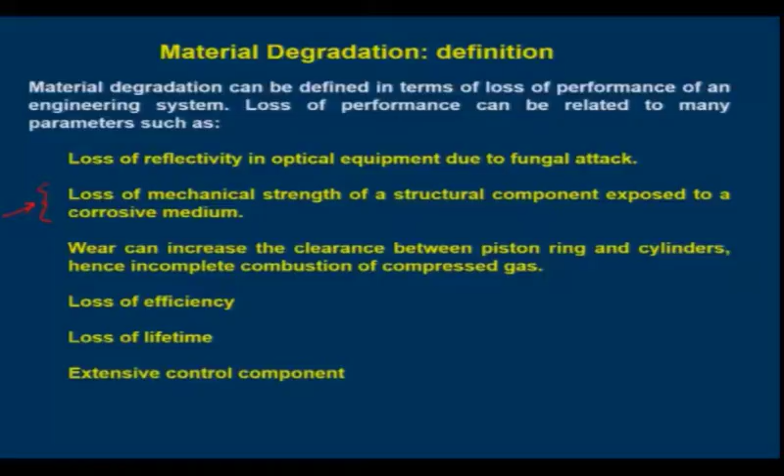Now, coming to the reasons or phenomena that can cause material degradation, there could be anything available in the environment, because every time we expose a material to the environment for our purpose, factors like heat, light, short wavelength electromagnetic radiation, radioactive emission, chemical and mechanical stress, and interactions with bacteria, fungi or other life forms. So all these factors will be reasons, in some way or other, for material degradation.

Hence, the classification of material degradation according to its basic cause is a first step in any plan to protect a specific material in a specific situation. That is what we have been talking about.

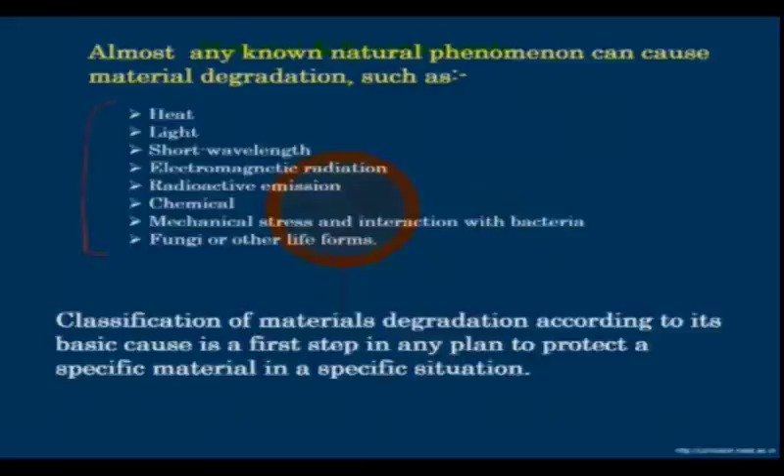Now, coming to materials and environments. Interestingly, if I look at materials, the first thing that comes to a material scientist's mind is basically the material tetrahedron. And in the material tetrahedron, if I draw it...

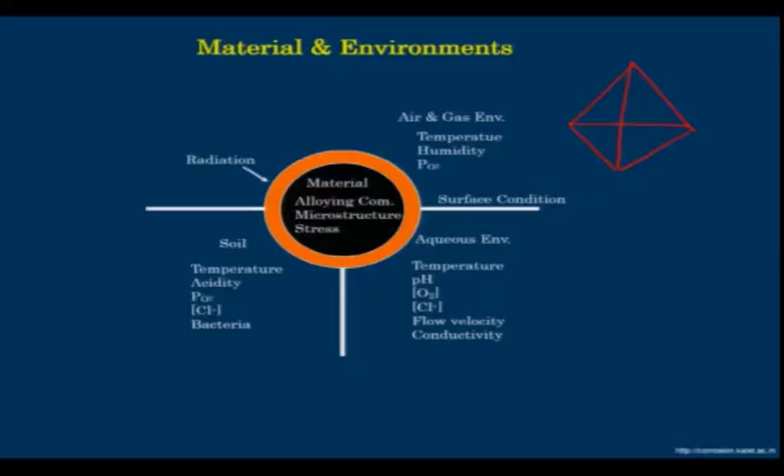This is the kind of material tetrahedron we see, where structure is one side, then processing, then performance, and then properties. Now, in the structure, we can also have one more criteria, which is called composition. For a particular composition, this structure, properties, performance, and processing are all interrelated.

So this is a classic material tetrahedron. Now, if I come to this particular picture, this material tetrahedron, we have made some material for performing some duties. For example, in some cases we need to hold a particular load, in some cases we need a kind of protection against corrosion.

Or we need to prepare material that can be protected, that can be resisted, all sorts of things. Now, if I consider materials, alloying compositions come under compositions, one particular field of the material tetrahedron; microstructure comes under structure again. Now, stress is basically a factor which can come under processing or performance.

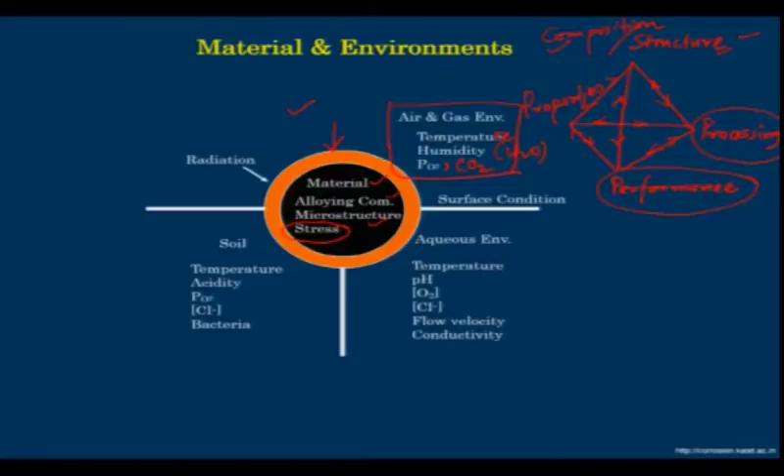Humidity, which is nothing but H2O content, PO2, oxygen concentration is there. Then there could be another factor, CO2, which is also available. Now these kinds of gases and environments, they many times have a negative effect on material performance, like atmospheric corrosion of iron objects.

Coming to surface condition, I will address that a little later. Now coming to aqueous environment - many times a material or structure is either in the soil, in water medium, or in chemicals, so that aqueous environment comes into play.

Whenever we come to aqueous environment, we have temperature, we have the H plus ion concentration or OH minus ion concentration, which is called pOH. So pH, pOH, dissolved oxygen content, chlorine ion - we gave an example of chlorine ion, but there could be other halides, for example fluoride. All sorts of halides are deadly towards the corrosion of metallic objects.

Now, flow velocity - this also comes in as a kind of corrosion aspect. You might have heard about cavitation. Cavitation is a serious kind of damage that happens due to a change in pressure during operation of impellers, pumps, and similar equipment. So flow velocity also plays a role.

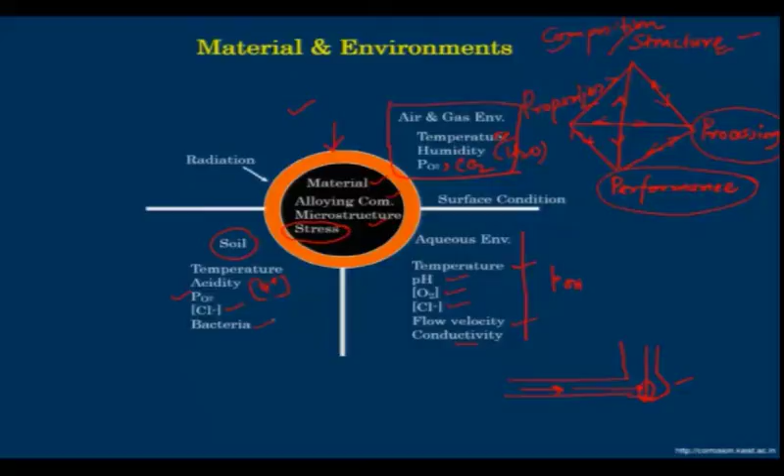So this is the surface condition - now coming to surface condition. Surface condition means whether something is exposed to the gaseous or air environment, or below that, within the soil, in water medium, or in other liquid chemicals. Now coming to radiation - this is also another factor which can lead to problems with materials.

So this is the relation between materials and environments, which is not a very friendly relationship. They are always trying to attack the materials.

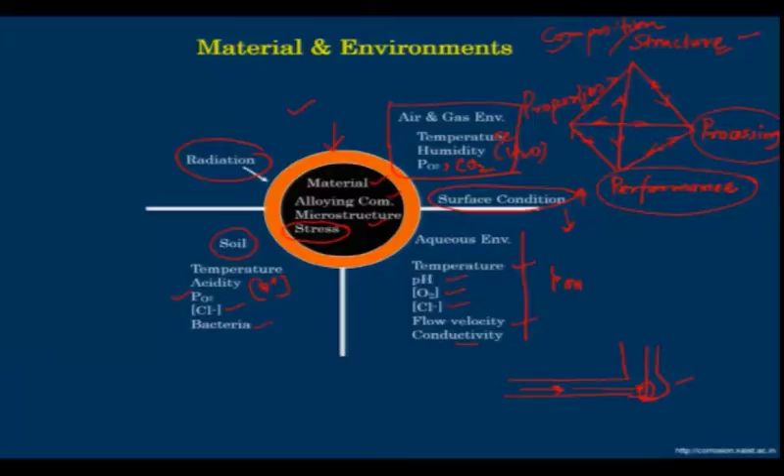Now coming to the corrosion part - let us forget about corrosion for the time being. Let us say, how do we get iron? Iron is first generally made in a blast furnace, and in the blast furnace, it is basically a reduction process, where we reduce iron ore in the form of FeO, Fe3O4, or Fe2O3. These three iron oxides are reduced by carbon, which is why iron always contains carbon.

If carbon presence is below 2% or 1.8%, we call it steel, and beyond 2% carbon by weight percent, it is called cast iron - this comes from the production route, which is the blast furnace. After reduction we send it to another plant called the steel making plant, where we do oxidation, because once we form iron from the blast furnace, it is generally called pig iron. That pig iron contains many impurities, which are removed by oxidation.

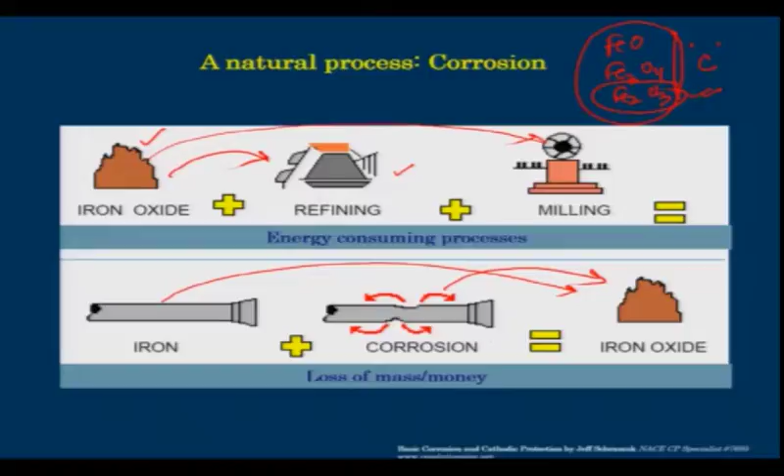Now coming to definition, there are two definitions. One is the practical definition: the tendency of a metal to revert to its native state, which relates to what we discussed earlier, where we are taking iron from iron oxide, and now we are reverting iron back to iron oxide. So the second process is a natural process, while the first process is energy consuming. This loss of material means there will be loss of mass and loss of money. So this is the practicality in it, the tendency of a metal to revert to its native state. Native state means iron oxide or iron ions, those are native states.

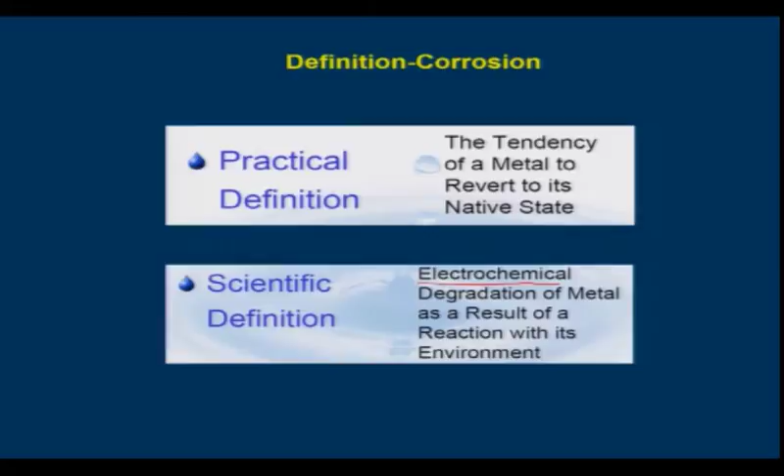Now the scientific definition: electrochemical degradation of metal as a result of reaction with its environment. Here interestingly we are using electrochemical, not chemical. Whenever we talk about corrosion, we must consider that the metal is reacting with its environment electrochemically. That means there is a formation of metal ions, so metal atoms go into ions. That is the scientific definition of corrosion.

Now coming to the definition of corrosion, continuing: the destructive attack on a metal by electrochemical reaction with its environment, as we have mentioned. Corrosion returns the metal to its oxidized or combined state in chemical compounds that are similar or even identical to the minerals from which the metals were extracted. So in this definition we combine both the practical and scientific parts. The first part, the attack on a metal by electrochemical reaction with its environment, is the scientific part, and the second part, corrosion returns the metal to its native condition, is the practical part. This combines both.

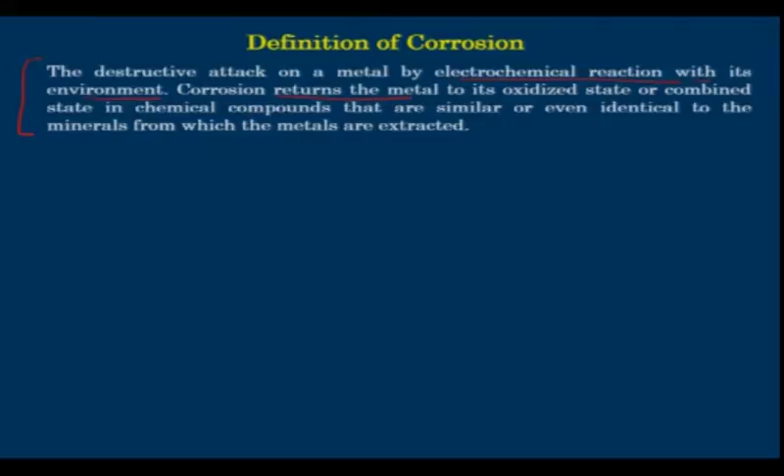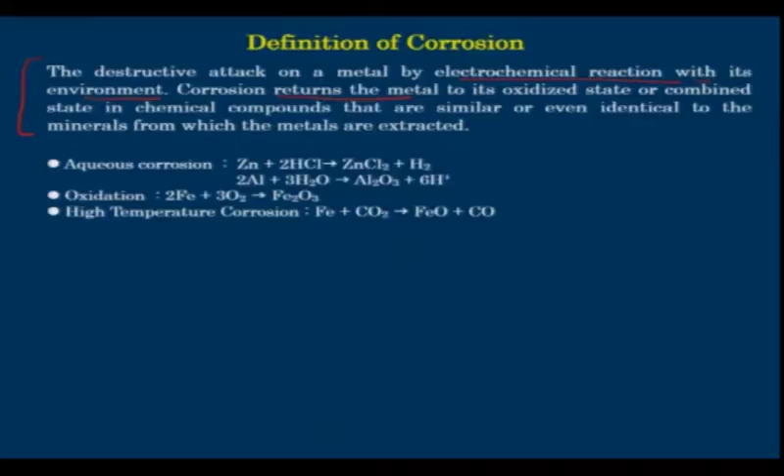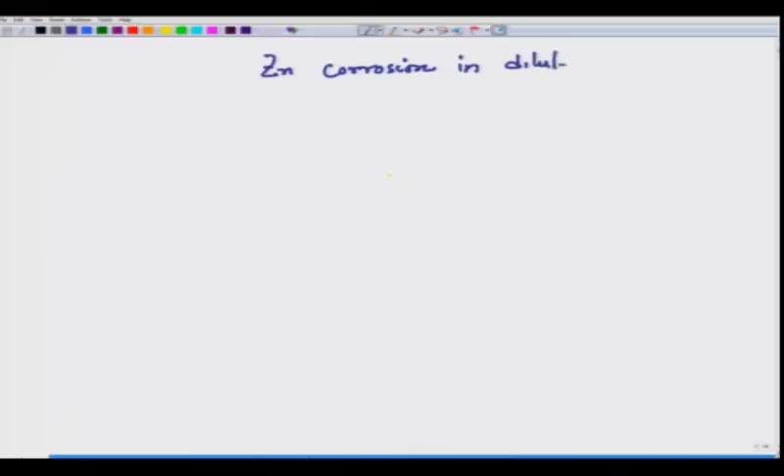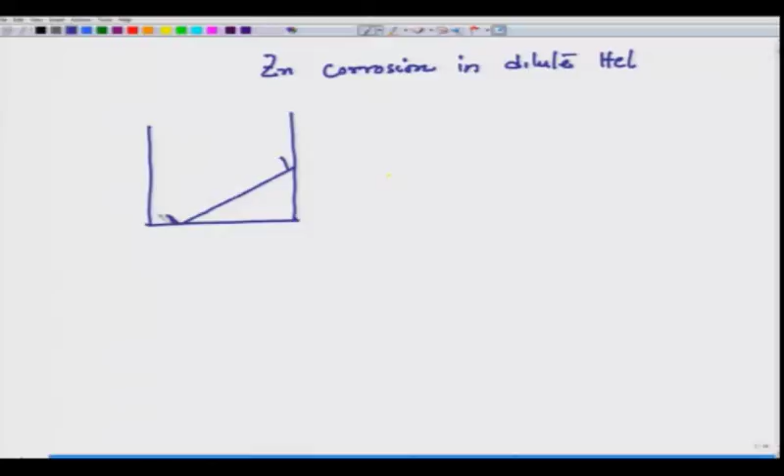Since we have started talking about electrochemical reaction, gradually we will get into the electrochemistry. Now let us see the aqueous corrosion of zinc in dilute HCl. Let us start with zinc corrosion in dilute HCl. If we have a container, and in that container we put a bar of zinc, this is zinc, and we have HCl here, this is dilute.

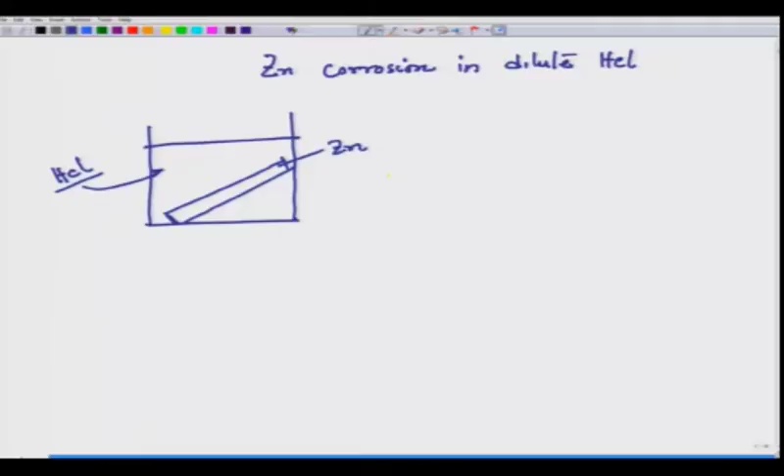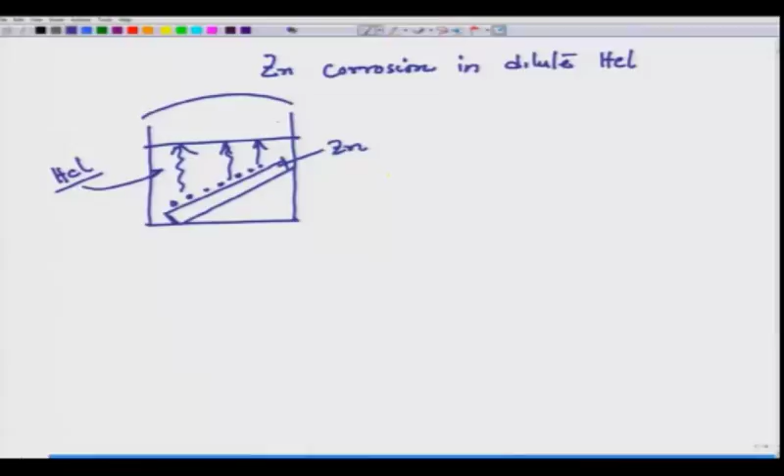Once we put in the zinc, we see bubbles forming on the zinc surface, and those bubbles are coming out with vigorous bubble formation. If we take this particular bubble, encapsulate this section, and then burn a matchstick near it, we will see that it gets burnt. So this particular gas coming out is nothing but hydrogen gas.

Now, if we see the reaction is zinc plus HCl equal to zinc Cl2 plus H2, and if we balance it, this is the balanced one.

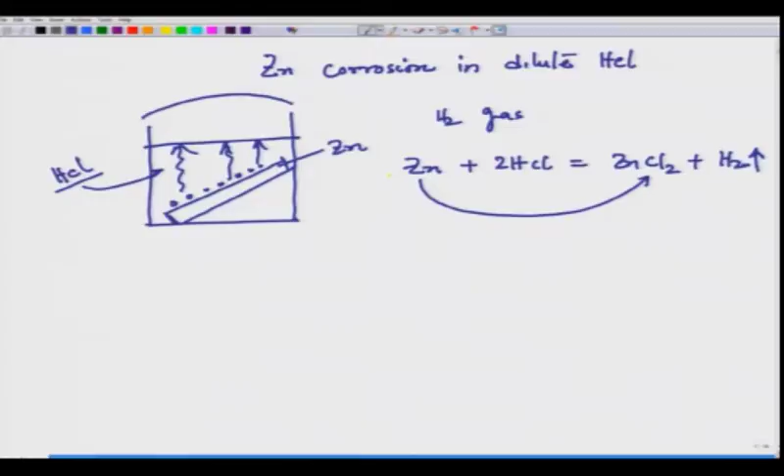Now we wondered where this electrochemistry is taking place. We have said that an electrochemical reaction must happen, because zinc is in metallic condition, and now it is going in the form of zinc chloride. This zinc is dissolving as zinc chloride, which will dissolve in that particular solution, and hydrogen gas is coming out. But if we break this particular reaction into two parts, you would definitely see that yes, there are electrochemical reactions.

Now, if I look at zinc, if we take 2 electrons out of zinc, it goes to zinc 2 plus ions. Since these 2 electrons are coming out from the zinc atom, they need to be taken up, because charge cannot remain unbalanced. So now there is HCl, and in that HCl you have H plus and Cl minus if we dissociate it. These H plus ions will take up 1 electron and form H, and if we consider 2 H plus ions, it is forming H2. So 2 atomic hydrogens will combine with each other and form H2 gas.

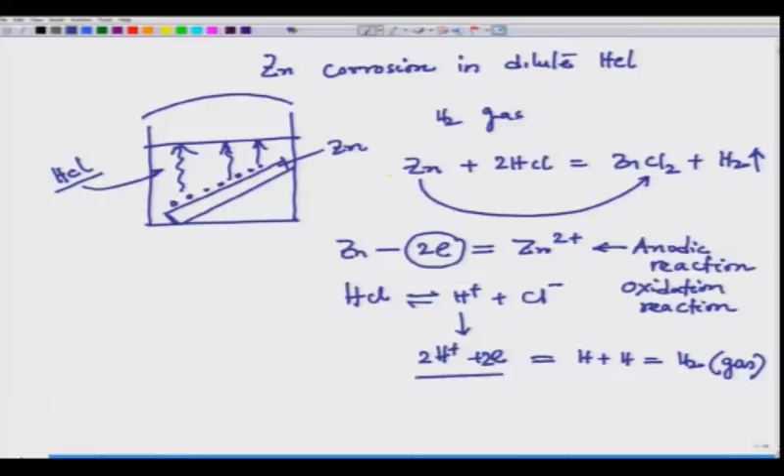Now, this reaction is nothing but the anodic reaction, or we call it oxidation reaction, and this reaction we call the cathodic reaction, or reduction reaction.

Now, whenever there is an anodic reaction or oxidation reaction, it talks about material degradation. That means the zinc atom is going into solution, so this zinc rod is gradually losing zinc. This is degradation, and it is happening because this reaction is electrochemical. These 2 electrons which have been released by zinc are taken up by 2 hydrogen atoms, forming hydrogen gas. So in this entire reaction we have 2 electrochemical reactions taking place.

One is anodic, another one is cathodic. Now the question is, how do these 2 electrons move to the site of the cathodic reaction? Electron must flow through a conductor.

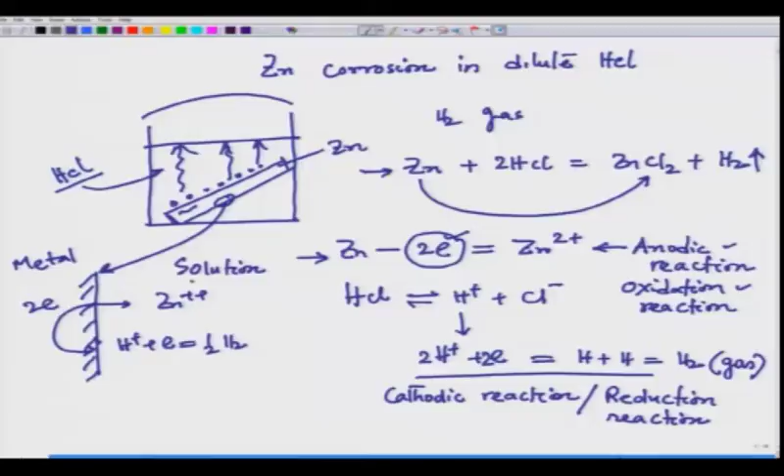So it is flowing. For example, let us zoom into this small segment. This is the metal side, and this is the solution side, where zinc plus ion is forming. So 2 electrons are released to the metal, and here let us say hydrogen is taking up electrons and forming hydrogen gas. So these 2 electrons are flowing through this conductor, and in this electrolyte, also called solution, zinc ion and chlorine ion are combining and forming zinc chloride.

So now, in order to have this entire reaction, we have 4 components. What are those 4 components? One component is the anodic reaction—where anodic reaction happens, we call it anode. Where cathodic reaction happens, we call it cathode. So these are 2 components. Then, where the electron transfer is taking place, we call it conductor. And of course, there is one more component, which is the electrolyte.

For example, if there is no electrolyte, these reactions cannot take place. So conductor is the third component, and electrolyte is the fourth. So now, for this particular zinc corrosion through electrochemical reactions, we must satisfy this condition that there must be 4 parts: anode and cathode, which form the electrodes, then conductor, and electrolyte. All 4 must be there.

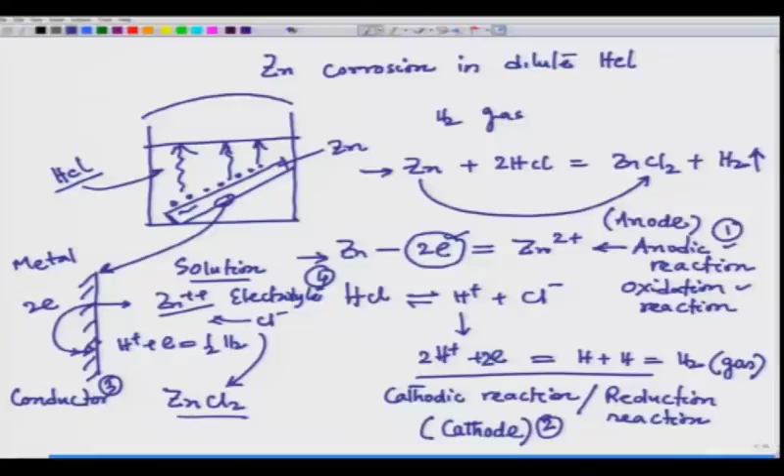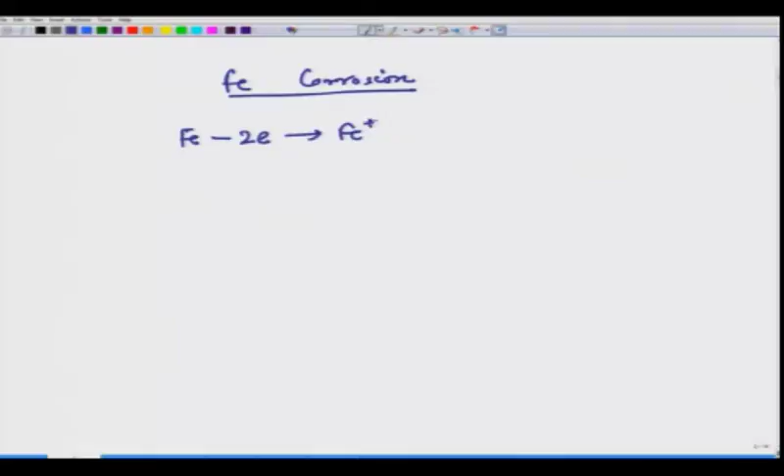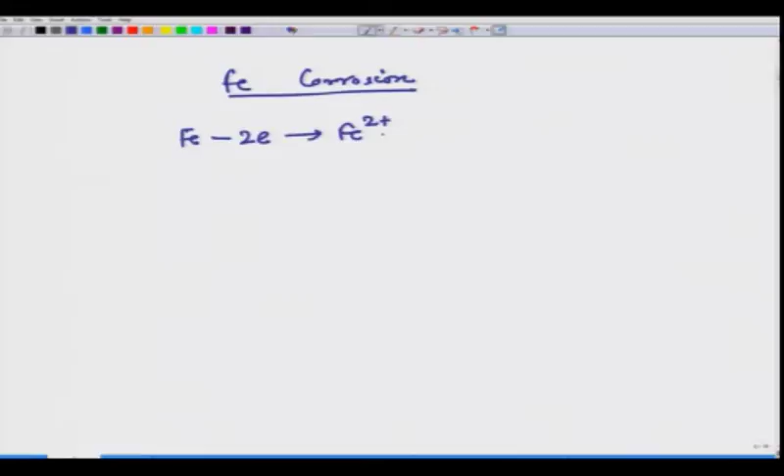Like that, if I see the iron part—now iron corrosion—there, iron, of course, if it needs to corrode, it has to form ions. So how can it form ions? It can lose 2 electrons and then go to +2, as we are putting this convention, 2 plus. So this particular ion would then react with H2O and oxygen.

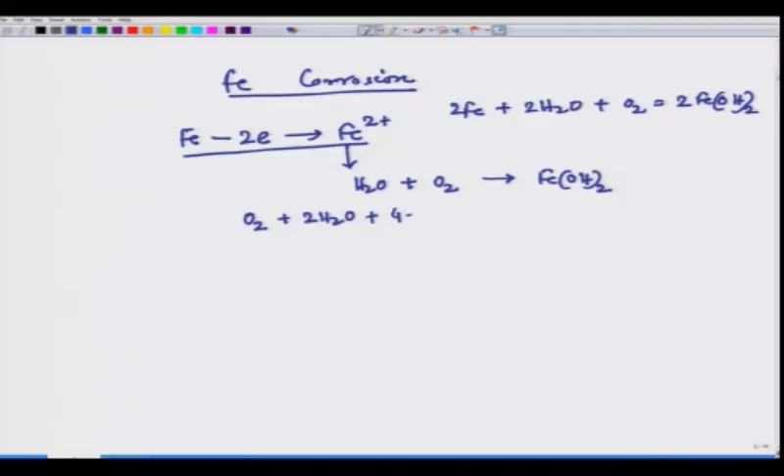Now, question is, this anodic reaction is of course there. Now, where is cathodic reaction taking place? We need to also consider one more cathodic reaction: O2 plus 2H2O plus 4E equals 4OH minus. So this is anode, or anodic reaction, and this is cathodic reaction, or cathode.

Electrolyte is nothing but this, moisture becomes electrolyte. This happens when a metal object, an iron object, is exposed to environment. This H2O becomes the electrolyte. Now, question is, this is cathodic reaction, and the electron flow would happen. These happen on the anode, these happen on the cathode, and electron flows through the iron object, which becomes conductor, and this becomes electrolyte.

Now, in the previous case also we could see that zinc itself is acting as cathode as well as anode, because the cathodic as well as anodic reactions are taking place on the zinc surface. Here also, the anodic surface as well as cathodic surface, iron is behaving in the same manner, if iron becomes cathode as well as anode.

Now, question is, we will not be able to tell specifically this part is cathode and this part is anode, because in the beginning it will be all statistically distributed reactions. That means only we can say where the cathodic reactions happen, and where the anodic reactions happen. But if I try to see the formation of this, it also follows the same route, that means electrochemistry.

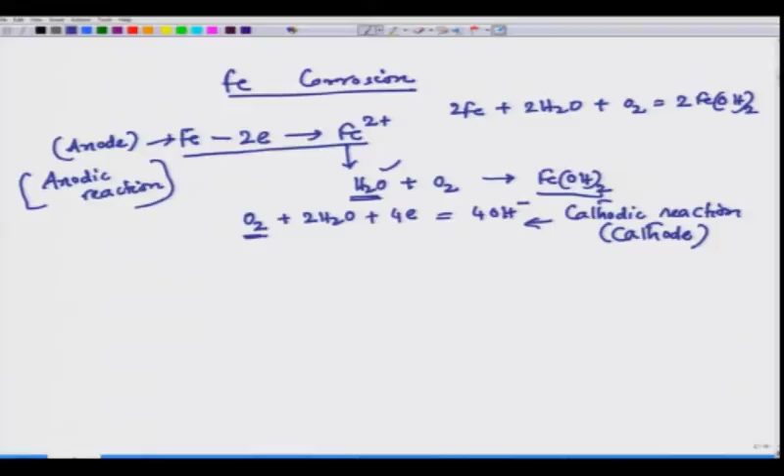Iron is dissolving by forming iron ion, and there is the cathodic reaction which is oxygen reduction. This oxygen is reducing, and of course, cathodic reaction is nothing but the reduction. And in case of zinc, zinc ion is forming anodic reaction, and hydrogen ion is getting reduced and forming hydrogen. So that becomes my entire situation: for iron corrosion as well as zinc corrosion, we follow electrochemical routes.

We would continue with this particular aspects, that cathode, anode, electrode, as well as conductor and electrolyte. This is the essence, or the backbone, of the corrosion subject. Now, before we end this lecture 2, I would like to just tell you that of course corrosion is deadly, but in some cases corrosion of course helps.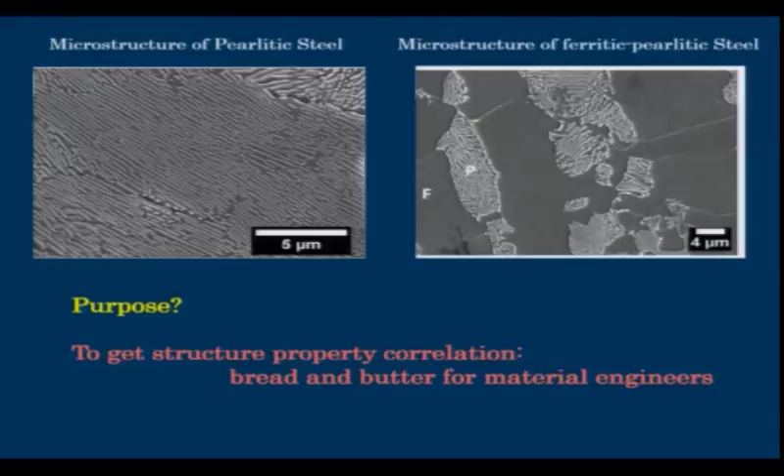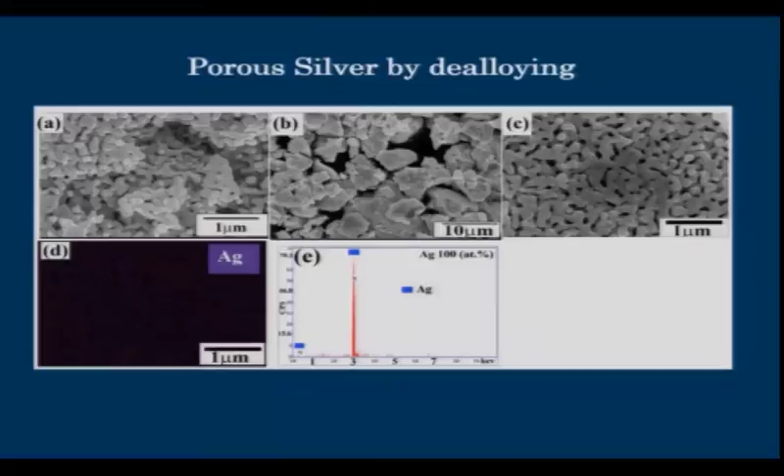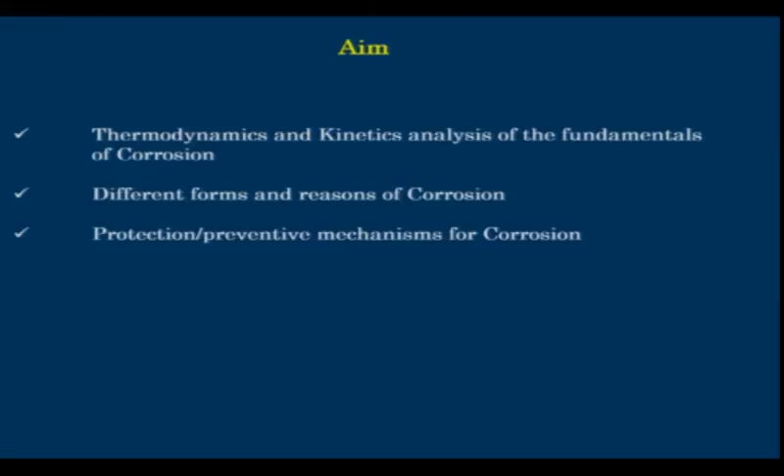So at the end, let me end this lecture by saying our aim is to understand thermodynamics and kinetics of corrosion, different forms and reasons of corrosion, and of course finally we would look at protection and preventive mechanisms for corrosion. Thank you very much.